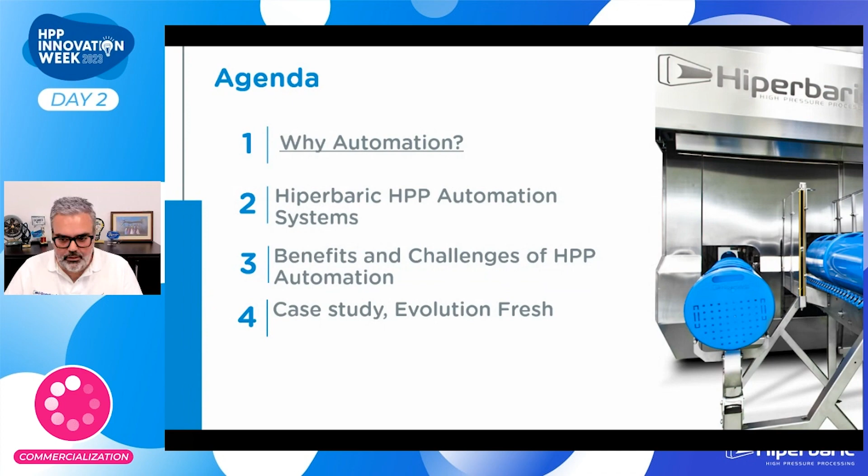So let's talk about why automation is taking relevance right now in the world. As you know, automation has recently been very important due to certain things that happened in the past, like the pandemic. There were a lot of things that changed throughout these past years. One of the main things that happened after the pandemic is that there were a lot of job losses.

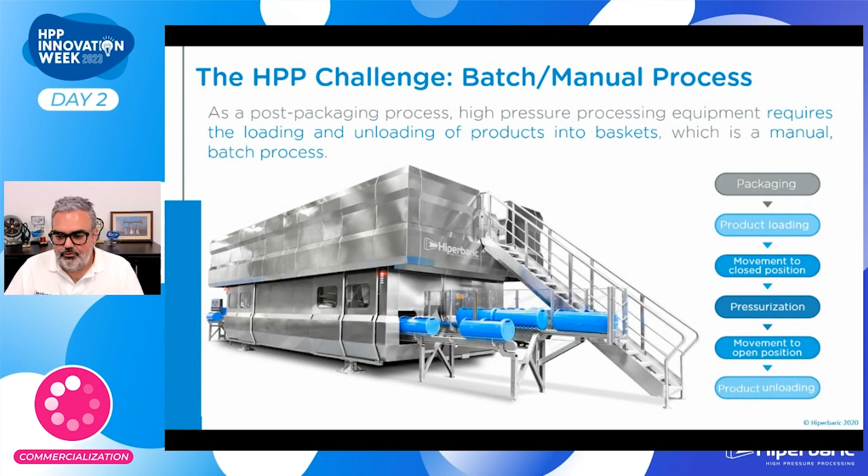But obviously we have to find a way to reduce that and get more efficient with automation, and that's how here at Hiperbaric, just a couple of years ago, we decided to start getting involved in automation systems for HPP operations. Since we have many years of expertise, we decided to try and help overcome these issues that our customers are experiencing. It wasn't by accident. We've been doing it for many years for a lot of customers, but now since it's taking more relevance, we decided to promote it actively.

So what do we do? Similar to what we do at Hiperbaric, we offer tailor-made solutions for HPP operations, not only for our machines but for the industry overall. These services cover automation, material handling, and Industry 4.0. We can do from very basic stuff right up to full line turnkey solutions for our customers.

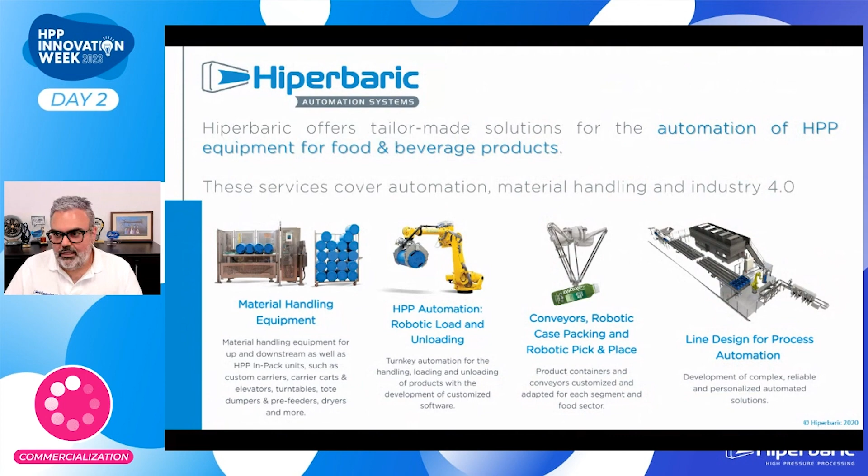I would also like to discuss why automation is important, the benefits of implementing automation, as well as the challenges people could face when implementing automation. It's not easy. Automation comes at a cost, but it also gives tangible results. One of the top benefits of implementing automation in operations is, first, productivity. You can maximize productivity by having repetitive motions controlled. A robot always gives you the same output, the same motions, and that's how you get productivity.

You can reduce labor cost. It depends on the application, but sometimes you can replace up to 80-90% of human intervention. In this case, we can at least reduce 60% compared to manual processing. You can get, as I mentioned, consistency. All repetitive motions can be done at the same frequency with the same accuracy. You can also ensure operator safety. You can prevent injuries by not having manual operations. Having people close to machines is always risky.

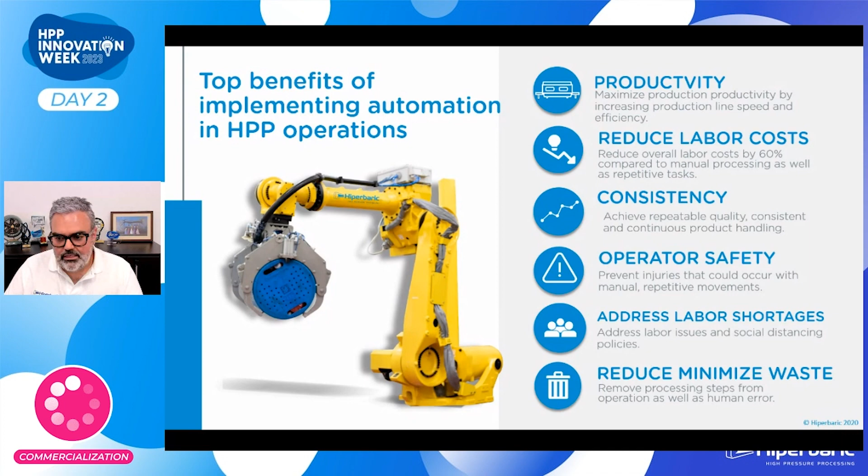Also, one of the benefits is that you can address what we discussed, the labor shortages, with a robot. Robots don't call in sick. They are reliable, and that's also one of the benefits. Also, the reduction or minimization of waste by not having workers. You can eliminate any human mistakes, any human errors, and therefore reduce waste.

Also, the challenges that you will have, or people will have, as you try to implement automation. The first one will be return on investment. Automation comes, as I mentioned, at a cost. So you have to carefully study what you need and how you want to solve the problems. Obviously, for complex and repetitive motions, it is highly recommended that you invest in certain automation. You can certainly reduce or eliminate those repetitive motions with a robot or a cobot.

Also, shortfalls. There's always internal shortfalls that make the task of implementing automation challenging. Try to always implement automation. It's hard. It's not easy. Not all people understand automation, and there are some shortfalls in there.

Functionality. Automation is sometimes not as flexible. So if you have a repetitive action, you can implement automation. But if you have a step in the process that changes throughout the day, then automation becomes more challenging. As I mentioned, identifying the needs is very important. You don't want to end up with something that may not work for you. So it's really important to take care and study the motions and study your processes to make sure that you can get what you need.

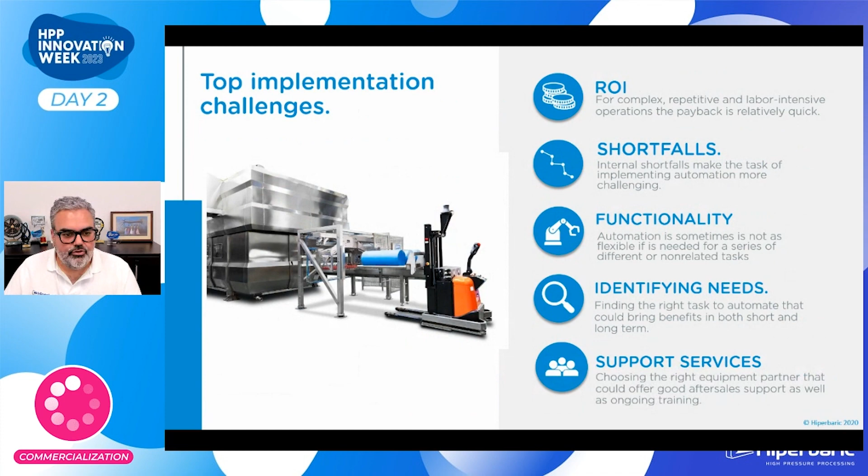And another very important challenge is finding the right partner that could offer not only the support but also the ongoing training that robots may require. And then, before going to the case study, I would like to show you a video of what Hiperbaric can do in terms of solutions. So I'll play a quick three-dimensional video that sort of shows you what HPP can do for you.

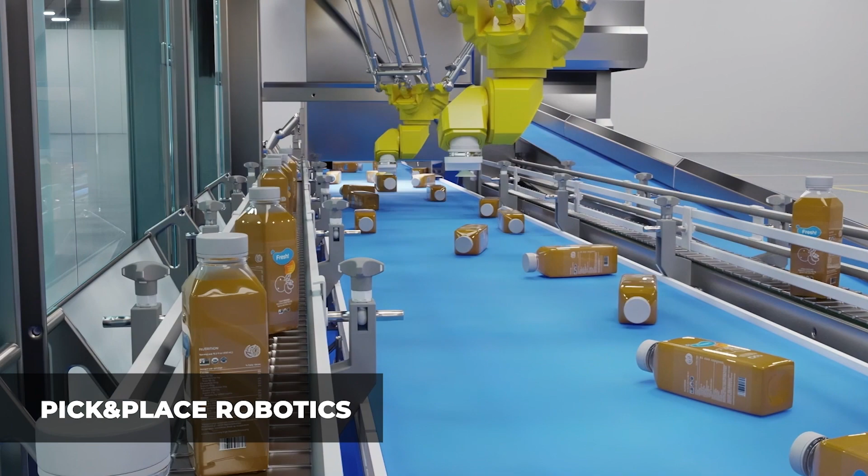Okay, perfect. So now, as I mentioned, I want to talk about a customer of ours. It's called Evolution Fresh. They are a prime example of what can be done and how it can be done throughout the years. So this company started right from the very beginning with a small machine, and as they have grown and the juices have grown in popularity, they have put more equipment in there. But not only that, they started doing manual operation, and throughout the years they have evolved and created different solutions to address certain tasks.

So as the business has grown and matured, they have implemented more and more automation to the point that right now the high pressure processing area is an almost fully automated cell. They started implementing loading and tilting stations, pre-feeding stations, right up to unloading stations and pick and place robotic spider robots that help them put everything in place and address labor shortages.

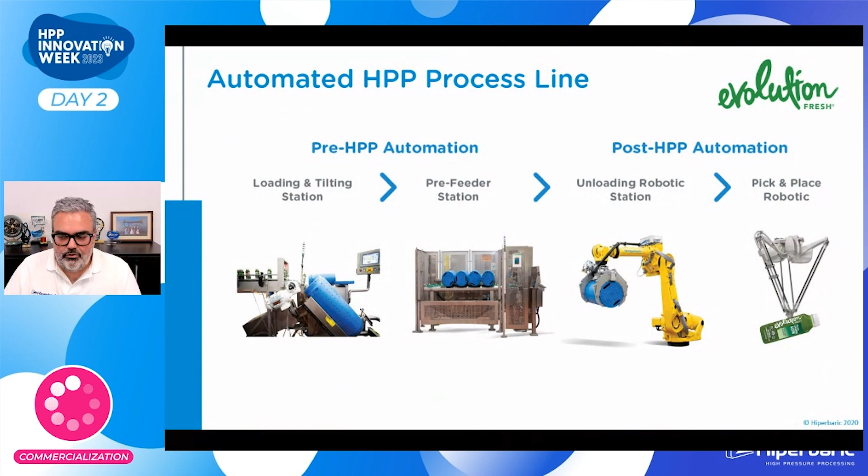And before I wrap up my presentation, I would like to show you finally another video that shows what Hiperbaric can do or has done for some customers. And after that video, I'll come back for wrapping up my presentation and see if there are any questions.

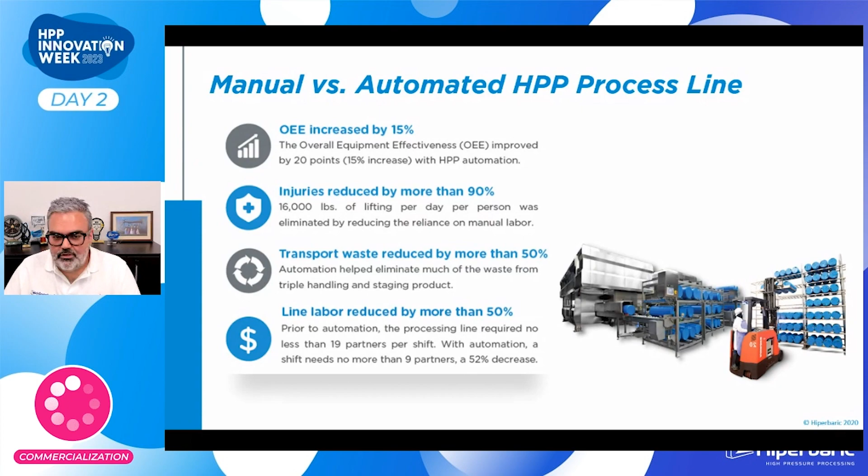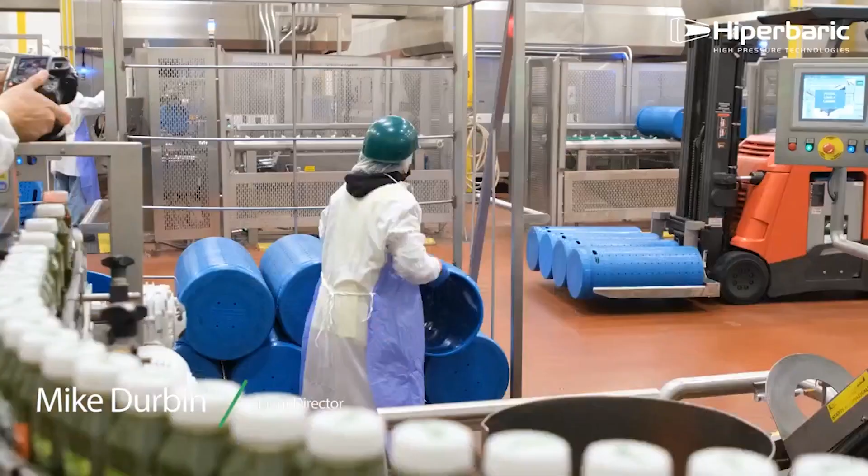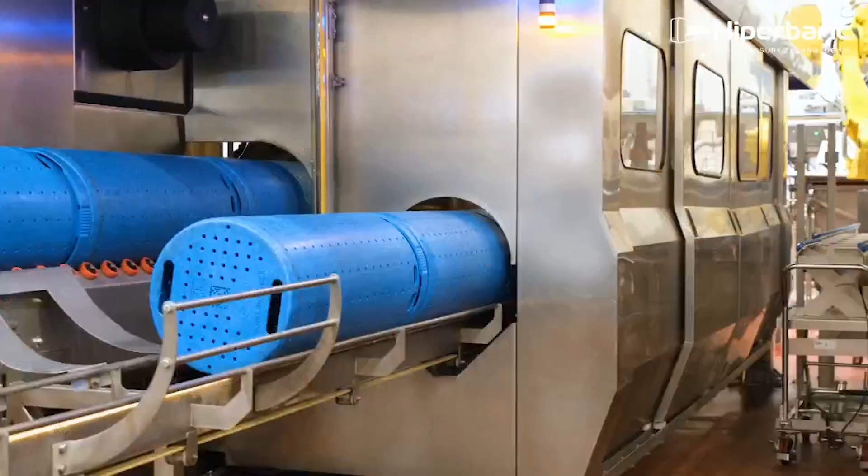So Evolution Fresh uses HPP because we believe it's a competitive advantage to provide the best of what Mother Nature can grow. Working with Hiperbaric as our HPP supplier has been an awesome experience. As we've grown with HPP, we've been able to use their resources to help us maintain the machines and become experts. Hiperbaric is always thinking about how they can make these machines run better for their customers, and it's not about how they make more money, but about how to improve your costs, and I think that really shows their care for their customers. I think that Evolution Fresh and Hiperbaric have a great relationship. We've been able to partner together and solve a lot of challenges over the years, and I look forward to continuing to work with them.